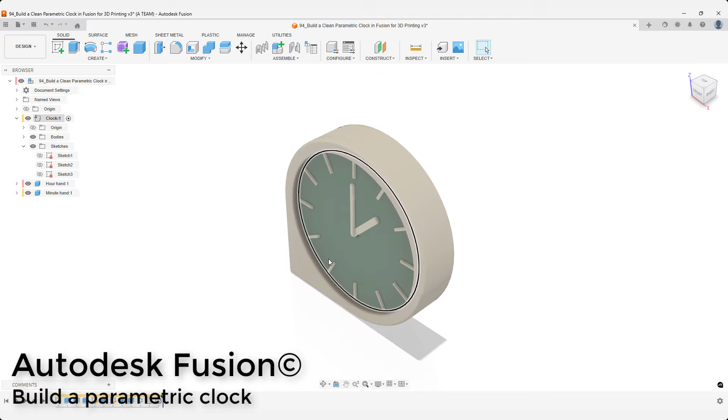This clock is fully parametric. Change one value and the entire design updates. In Fusion, I'll show you how to build it, how to fix constrained sketches when things break, how long it actually takes to 3D print at different settings, and what it would cost to have this manufactured instead of printing it yourself.

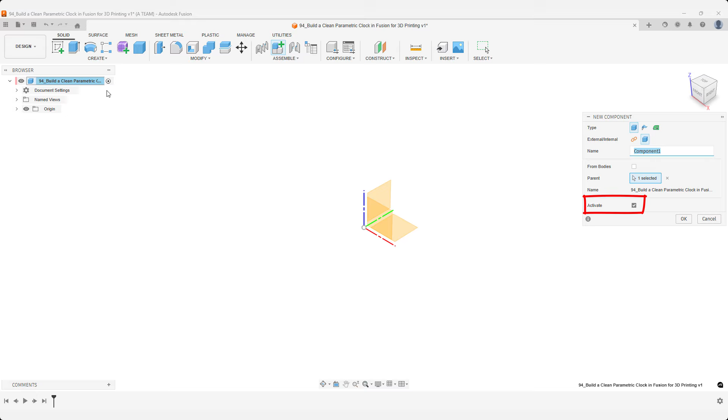Create a new component first. Clean structure makes everything easier later. Use the S key to open design shortcuts and search for parameters. Menus are useful when you're learning, but shortcuts are faster and let you find tools you might already recognize from other CAD programs.

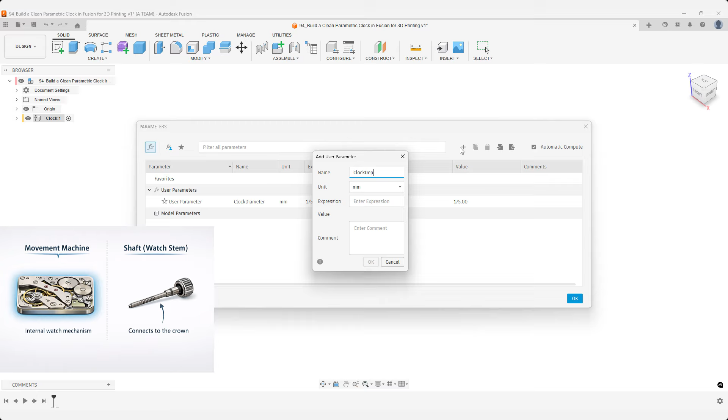We start this design with a small set of user parameters: the diameter, the depth, the movement mechanism, and the shaft that belongs to that movement. The movement mechanism and shaft are not 3D printed, but the model needs to make space for them. It's good practice to think through your parameters in advance, but you can always come back and add more later. And in this project, we will.

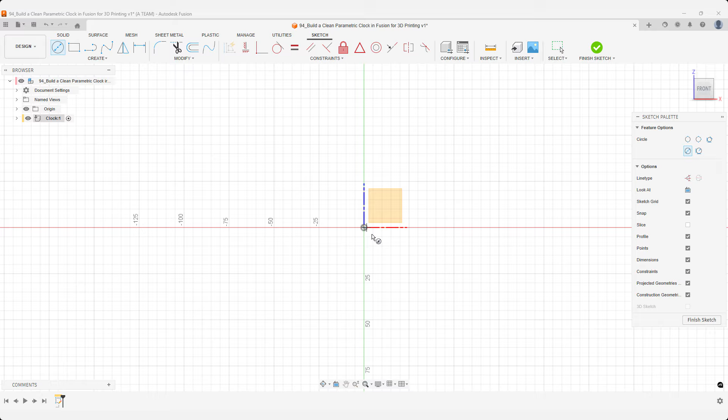For faster data entry, leave your mouse near the plus button and use the tab key to move between input fields. Press enter to confirm and close the dialog when you're done. Use design shortcuts to create a new sketch on the construction plane facing you. Press C to create a circle, start from the central point at the origin, and set the diameter using your clock diameter parameter. Next, press O to offset this circle.

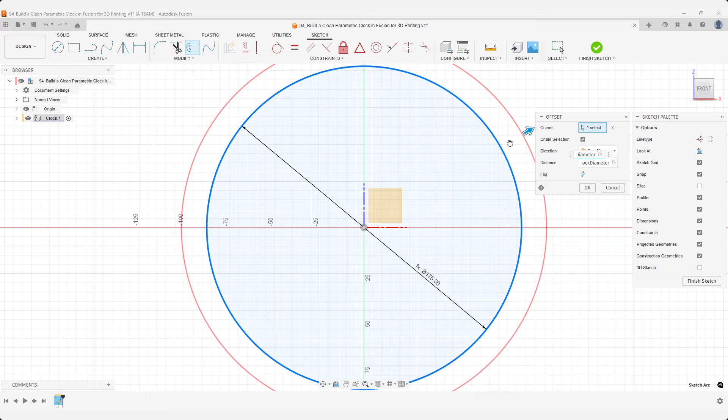We want the outer diameter to update automatically when the clock diameter changes, so use a simple formula instead of a fixed value. In this example, I offset the circle by 0.08 times the clock diameter. With a diameter of 175, that gives us an offset of 14. Now, if we update the clock diameter, the outer diameter updates as well. This keeps the design fully parametric and easy to adjust later.

Press C to create a circle for the shaft as well. When designing a real clock, leave a bit of room for tolerances and expect to iterate. It usually takes a few design and print adjustments before the fit is right. Press R and sketch a 2-point rectangle starting from the origin. Creating the rectangle first makes it easier to add formulas when referencing other dimensions.

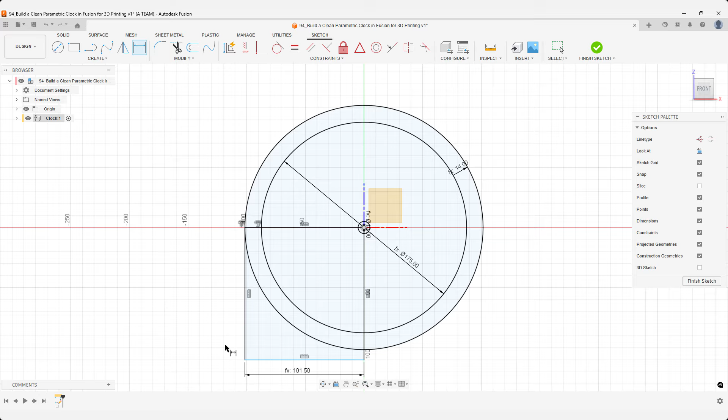Press D to activate dimensions. For this dimension, use a formula that captures both the offset circle diameter and the clock diameter. Then divide the result by 2 since we only need the radius length, not the full diameter, for a 2-point rectangle. For the second dimension, there's no need to repeat the formula, simply reference the dimension you just created. This saves time and reduces the risk of errors by keeping the setup simple.

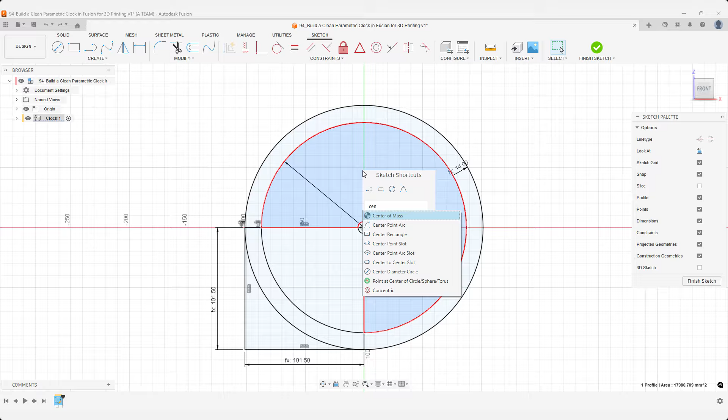You now have the sketch for the foot. Next, we'll create the index marker. Open Sketch Shortcuts and choose the center rectangle. This rectangle type works well here because it makes alignment to the center of the design straightforward. Set the height to slightly more than 10% of the clock diameter. For the width, use a fixed value. This means the length updates when the clock diameter changes, while the width stays fixed at 3 mm.

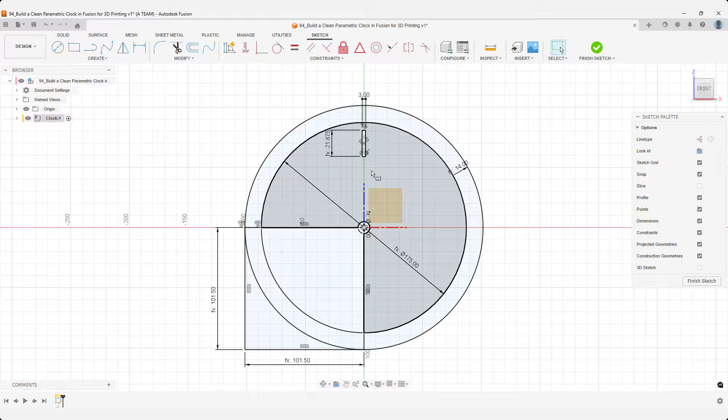We'll run into a few issues around this setup and fix them near the end of the tutorial, but for now, we'll keep moving. Finally, add a dimension that controls the distance from the center of the clock. This dimension should also update with the clock diameter. In this example, I set it to slightly more than 40% of the full clock diameter.

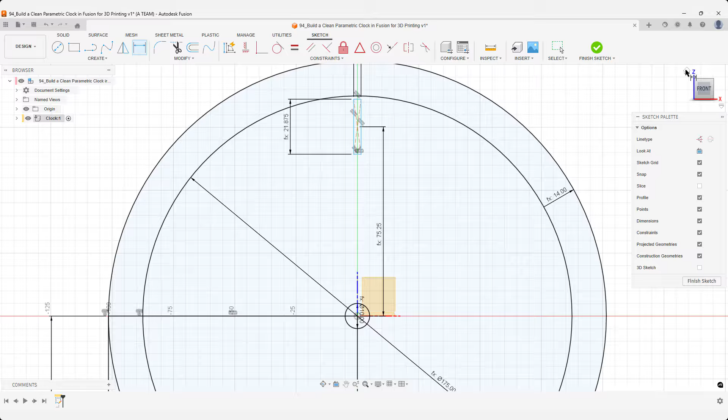If you have trouble selecting the right object in a crowded sketch or when geometry sits behind other objects, press and hold the left mouse button. This opens a pop-up menu showing all available selection options at that location. Jump straight into the Extrude command by pressing E. There's no need to close the sketch first. Small habits like this save time and they add up fast over longer projects.

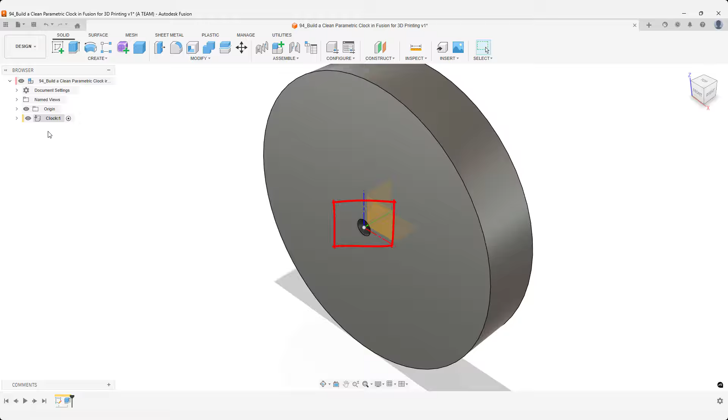Select the clock geometry, including the index marker, but leave out the symbolic hole for the shaft when you extrude using your depth parameter. After the extrude, the sketch visibility is hidden automatically. Go back to the browser and turn the sketch on again so you can continue with the remaining extrude operations. Make sure your next extrude is set to new body. This gives you the flexibility of individual bodies, which is especially useful for multicolor 3D printing and later design changes.

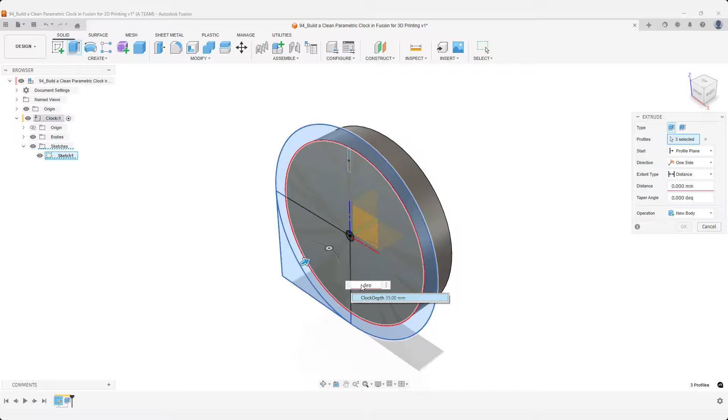While the operation is often set to new body by default, always pay attention. When you create geometry next to existing bodies, Fusion will often suggest join instead. That small change can merge bodies unintentionally, so make it a habit to double-check the operation type before confirming the extrude. Give the front a formula if you want the depth to update automatically when you change the clock diameter. Add a minus sign in front of the value, since this extrude runs in the opposite direction of the default extrude direction.

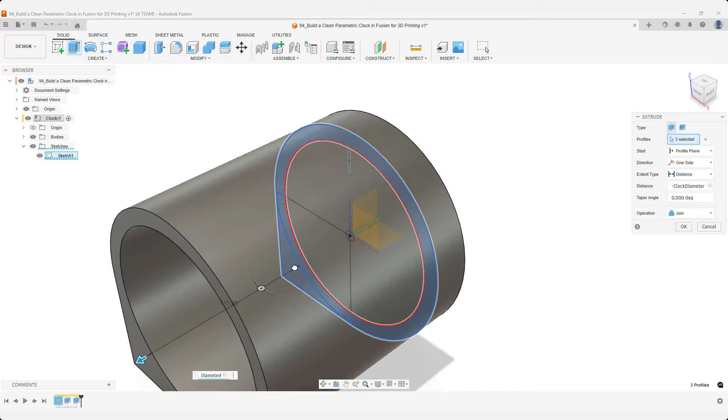Before confirming, change the operation type back to new body, since Fusion switches it to join as expected when working next to existing bodies. This keeps, as mentioned earlier, the front as an independent body for later adjustments in Fusion and for multicolor control in your 3D printing slicer.

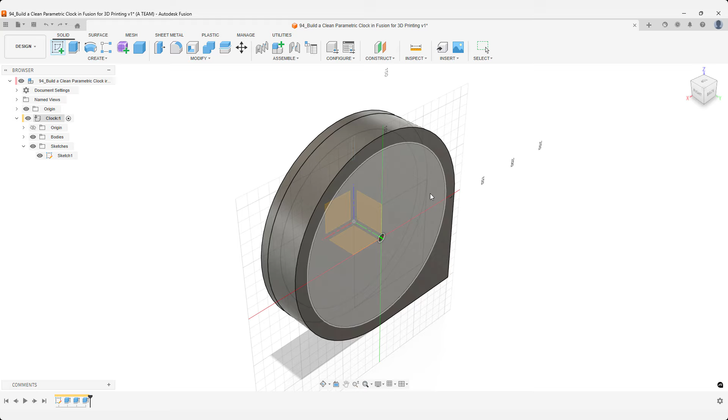This sketch on the back creates space for the movement mechanism, and these dimensions should stay fixed even when you change the overall clock size. Because of that, use fixed values instead of formulas here.

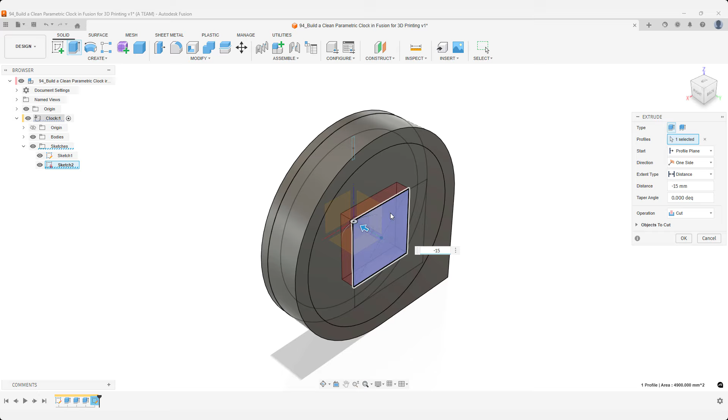From a manufacturing perspective, you can't bridge a span this wide if you 3D print the clock with this side facing down. There are a few ways to work around that. One option is to print a separate insert with a small bridge that fits inside this rectangular opening, allowing the main body to print cleanly without support.

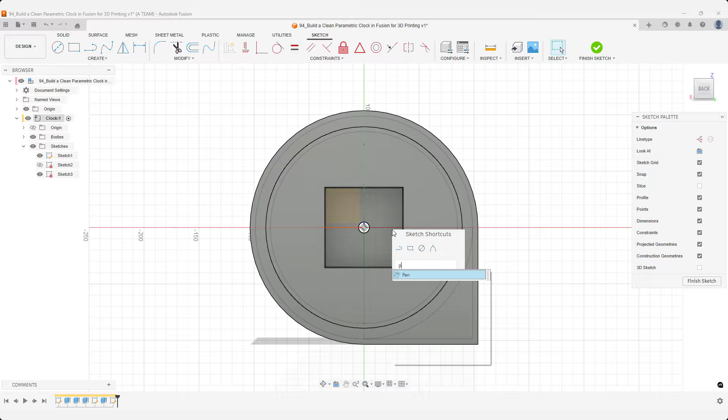For design purposes, create a projected sketch from the shaft hole and offset it slightly to allow for manufacturing tolerances. You'll almost certainly need to print and test this to find the right fit. To save time and filament, do that testing on a small standalone part instead of printing the entire clock.

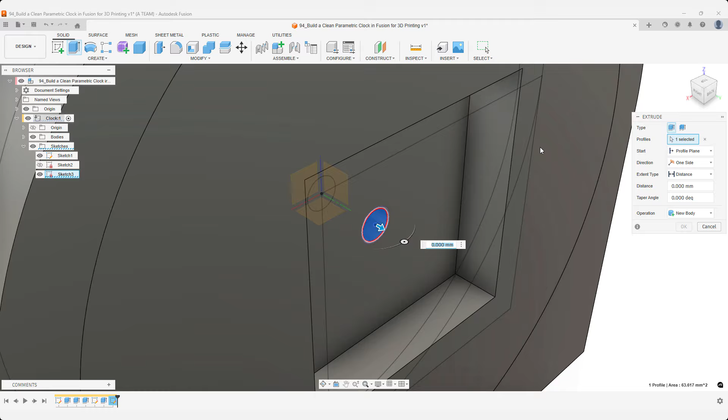Extrude this feature so it references the clock's depth by extruding to the body, then add a small distance in the formula so the symbolic shaft stands slightly proud of the clock surface. If you plan to design and 3D print the minute and hour hands as well, reverse engineer the shaft geometry so the hands fit correctly onto it.

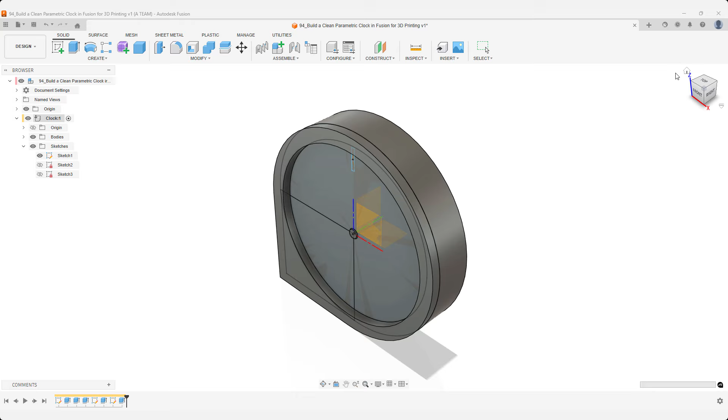Great job keeping up. Now is a good time to save the project before you move on. Next, we'll extrude the index marker: start the extrude command, select the index profile and set the operation to new body. Before you confirm, double check that the operation hasn't switched back to join.

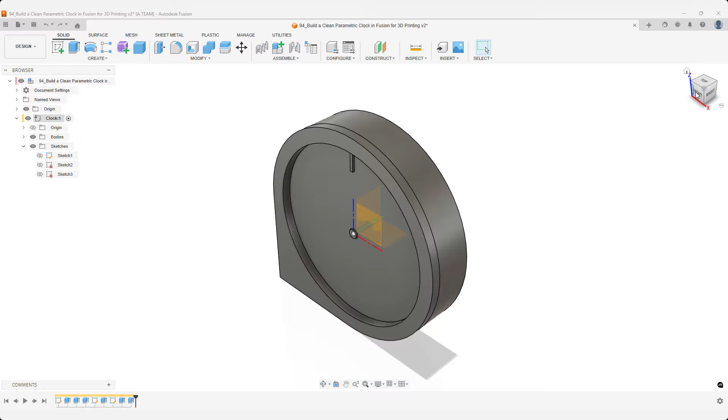We'll pattern this part later, so here's a time-saving move. Apply the appearance now, before you create the pattern. That way, every body created by the pattern inherits the same appearance automatically and you avoid redoing the styling work.

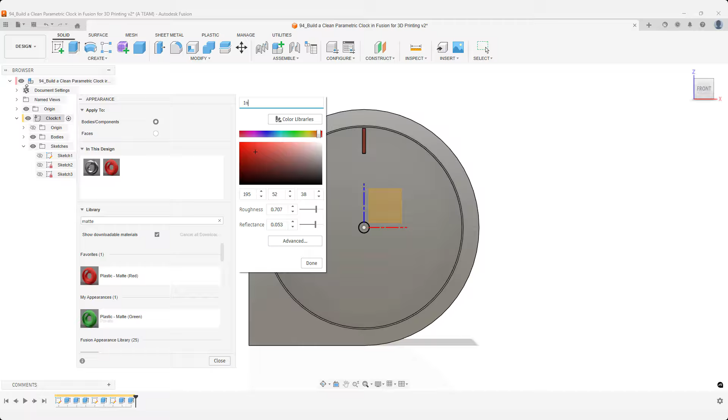If you're using custom appearances, rename them. It makes it much easier to stay organized once your design starts to grow. And if you need RGB or HTML color code ideas, there are plenty of great sources online, including AI tools. For reference, the keyboard shortcut for appearances is A.

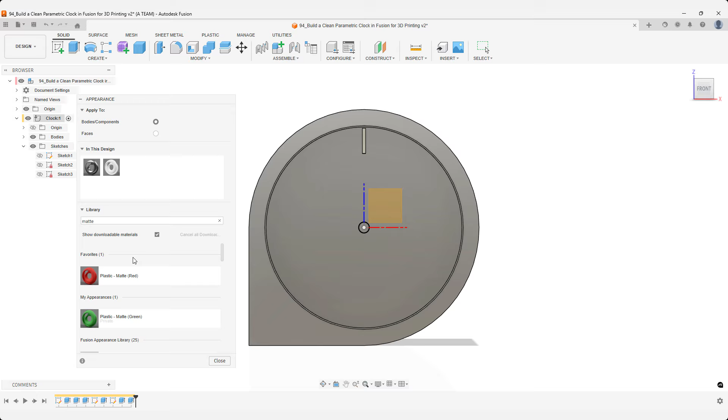Now continue by opening Design Shortcuts and selecting Circular Pattern. Use the View cube to change the view so selection is easier. Select the index body as the object and use the green axis as the pattern axis. Set the quantity to 12 and confirm the pattern.

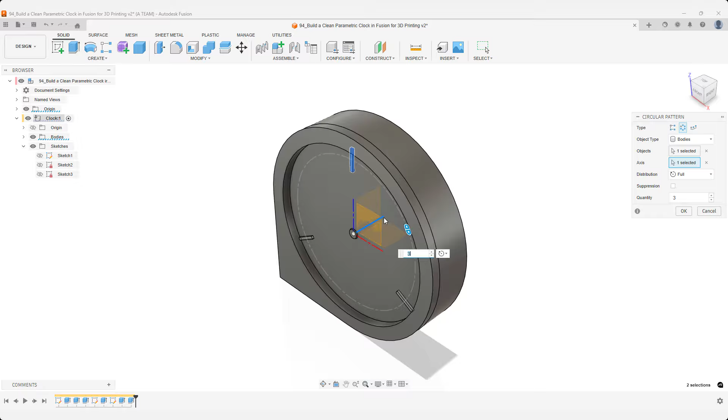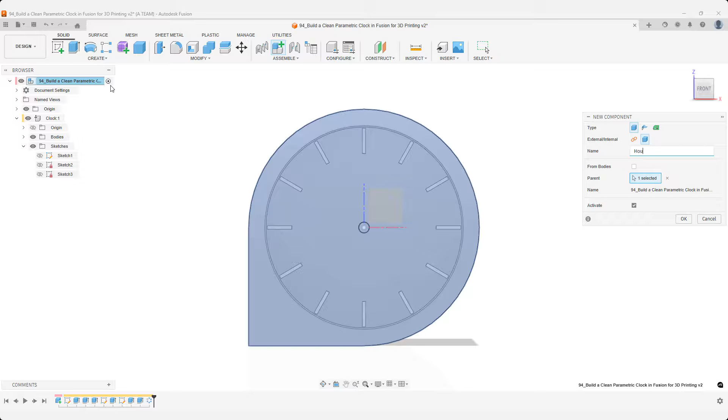With all 12 index markers in place, activate the top-level component. Create a new component, then use the Tab key to jump directly to the naming field. Name the activated component Hour Hand and confirm.

In situations like this, it's often easier to come in at a slight angle when selecting the sketch face. That makes it much clearer which face you're working on and reduces the risk of picking the wrong one. There are several slot commands available. The center-to-center slot is a good choice here, since it lets you define the slot by sketching its endpoints directly.

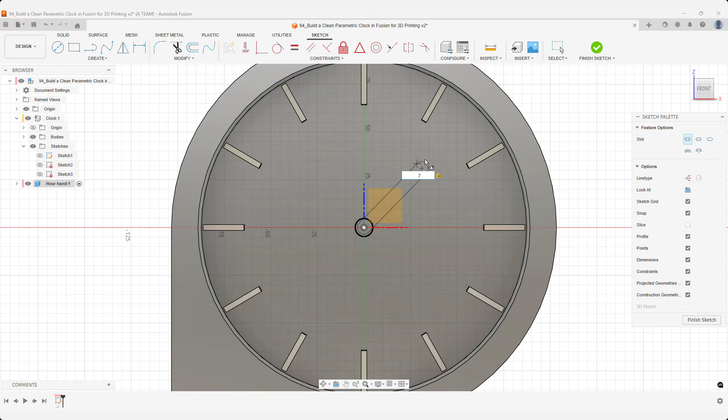When you add the dimensions, include the clock diameter in the formula. That way, the sketch updates automatically when the clock diameter changes. At this point, the setup is theoretically correct, but the sketch is not fully constrained. That will cause some issues later on, which we'll fix toward the end of the tutorial. I've intentionally left this in the recording because this is a very common situation to run into.

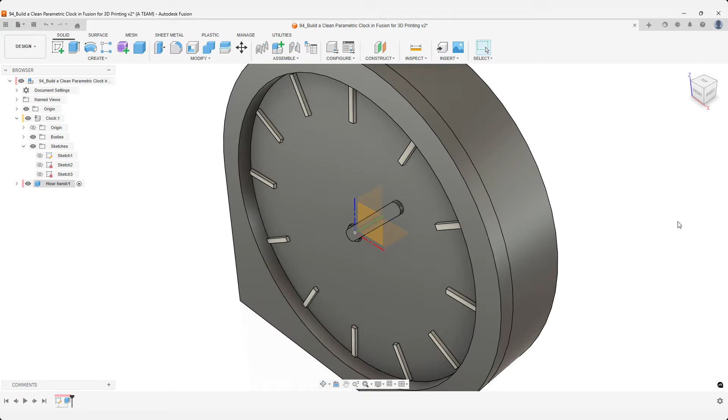For the width, I'm suggesting a fixed value here. If you prefer, you can also make it parametric using the same design principles we applied earlier in the tutorial. As a design choice, I'm also using a fixed depth. This gives direct control over the feature depth and keeps it aligned with dimensions that work well for common nozzle sizes and typical 3D printing settings.

With the hour hand in place, repeat the same workflow. Create a new component and name it. Continue with the bottom-up design approach and sketch the minute hand directly on top of the hour hand component. Use the center-to-center slot again, but update the formula and change the fixed width value.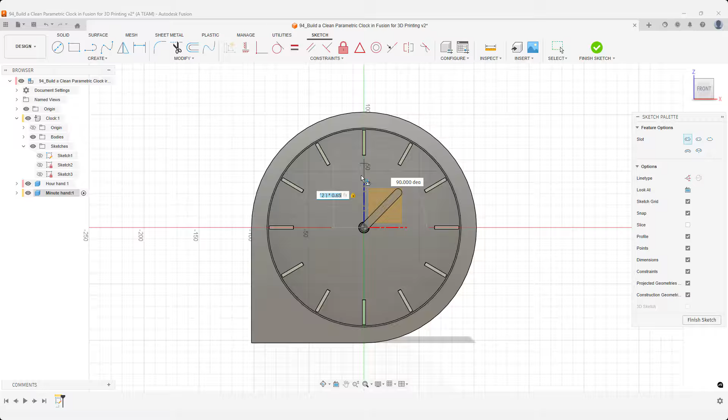The math here is very simple. If formulas feel unfamiliar at first, don't worry. You'll get comfortable with them quickly. Just like before, go straight from the sketch into the extrude command. This keeps the timeline clean and avoids unnecessary steps.

Set a fixed depth of 1.5 millimeters. A fixed depth gives you predictable results for 3D printing and helps avoid weak or overly thin features. It's time to fillet the edges. This improves the visual quality, the tactile feel, and in some design scenarios, overall strength.

Before you start, activate the clock component. This ensures the fillet is recorded in the correct component and keeps the design structure clean. Add a simple, discreet fillet to the inner circle. In the fillet options, choose the tangency setting and set it to G1.

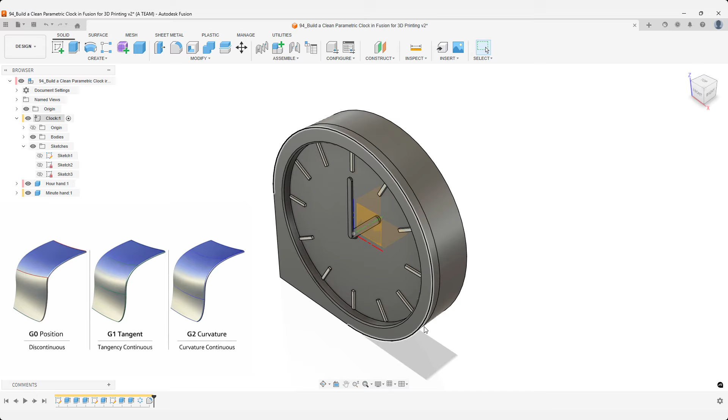G1 tangency means the fillet is tangent to the adjacent faces. In practical terms, this gives you a smooth visual transition without forcing curvature continuity. The surfaces meet cleanly, but the curvature itself is allowed to change at the transition. This makes G1 fillets predictable, stable, and well suited for mechanical parts and 3D printing.

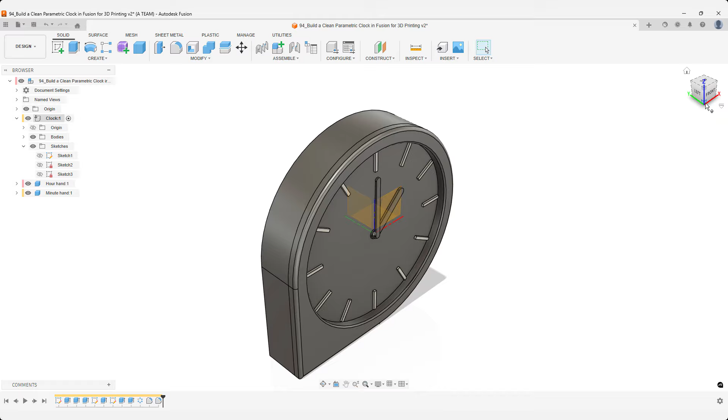Higher tangency levels focus more on aesthetic surface flow, but G1 is often the right balance between simplicity, robustness, and manufacturability. It's soon time to test the parametric setup and fix a few small issues, but before that, I'll fast forward a bit here to save you some time while adding the final appearances.

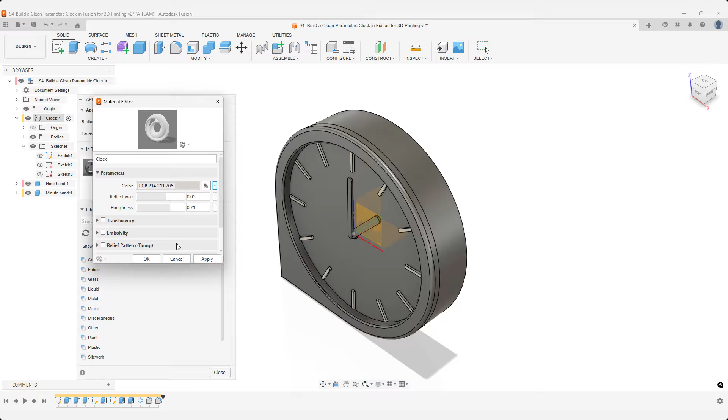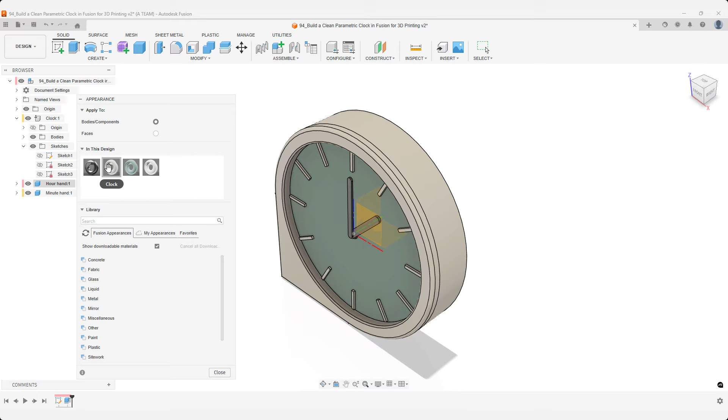One thing worth mentioning is that you can duplicate appearances to quickly reuse the same material type. This is much faster than starting from scratch each time. It's also a good idea to rename your appearances. When materials look similar, clear names make it easy to identify the right one just by hovering over them.

This is also a good point to adjust a few settings to better present the model. You can change the visual style to get a cleaner look, turn off the origin to reduce visual clutter and make the design easier to read. Before updating any parameters, save a new version with a clear description. That way you have a clean reference point and can always roll back if something breaks when the parameters update.

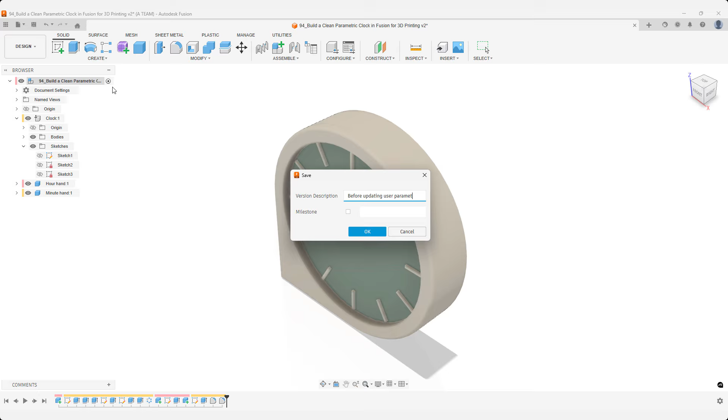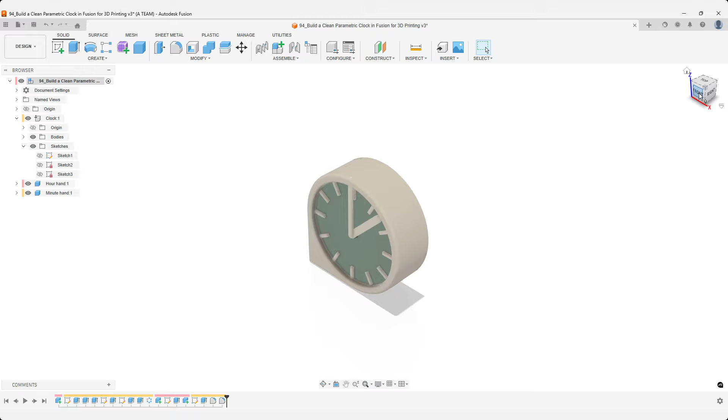Moment of truth. Let's test this. When we scale the clock down, the hour and minute hands don't follow, so something is clearly off. To debug this, the different colors assigned to the components are visible in the timeline, which makes it easy to locate the correct sketches.

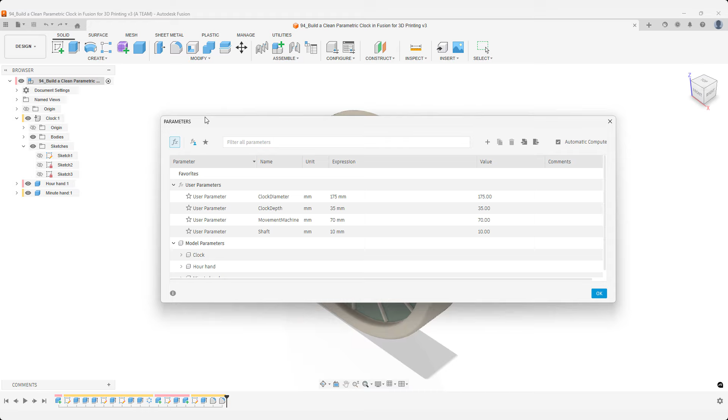When you open the sketch, you can see the problem immediately. The sketch isn't constrained, so it doesn't respond properly when the main dimensions change. To fix this efficiently, add a user parameter for the hour hand that references the clock diameter. This ties the hand length directly to the overall size of the clock and restores the design intent.

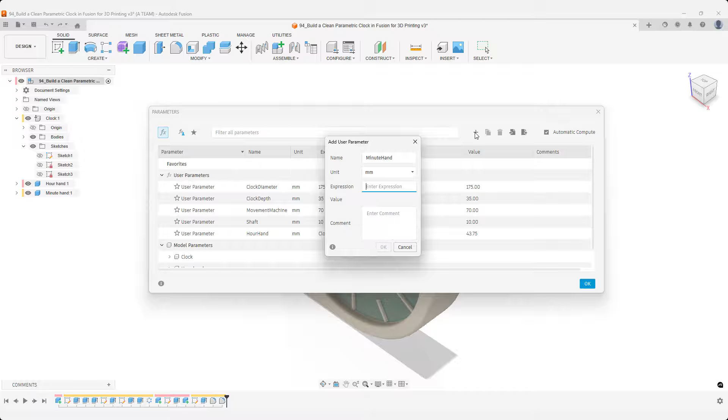We'll assume the minute hand has the same issue. Add a corresponding custom user parameter for the minute hand component as well. Once both parameters are in place, the hands will scale correctly when the clock diameter changes. Switch to the correct components and update the sketches using your new user parameters.

Small mistake on my end when I updated the hour hand. I should have constrained that sketch. In this case, adding the parameter is enough to fix the behavior, but it's still better practice to fully constrain it so it won't drift later.

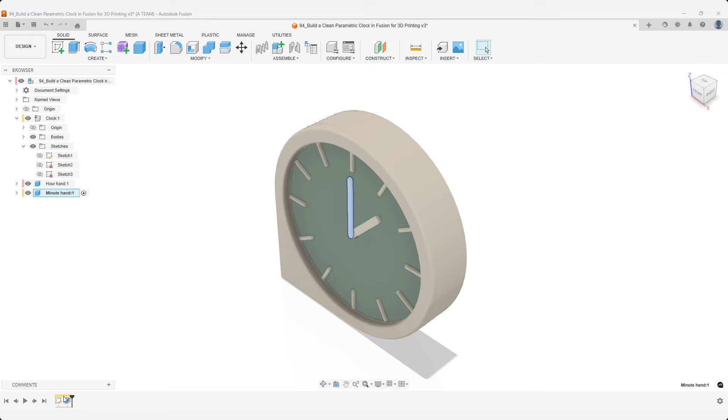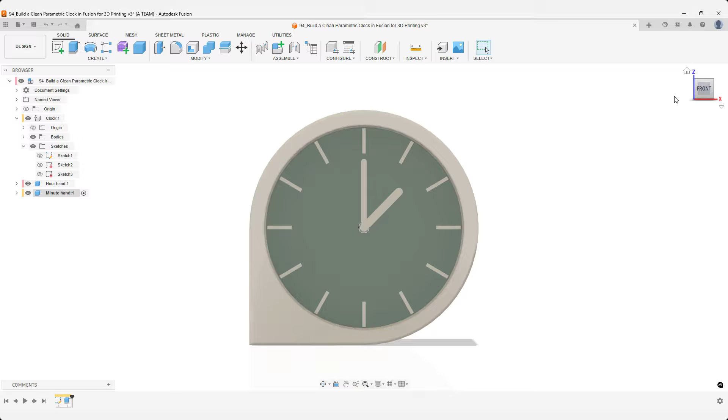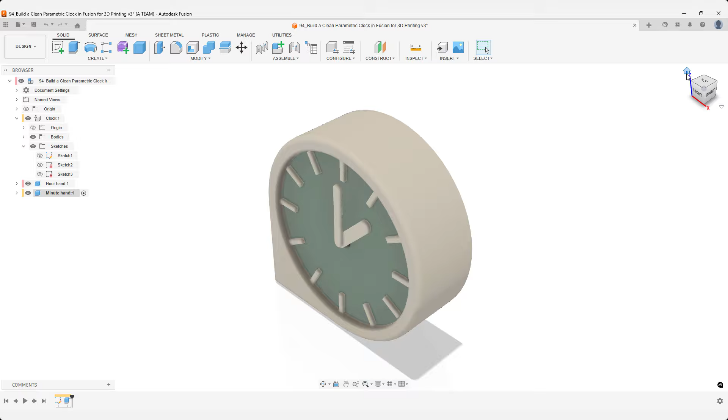With both parameters in place, let's update the model again. When we change the clock diameter from 175 mm to 100 mm, the hands update as intended, but a new issue shows up. The index marker has drifted to the right, and this is the consequence of leaving that sketch under-constrained. The troubleshooting approach here is slightly different. The good news is it's easy to locate the problem sketch, because we captured so much information in the original sketch.

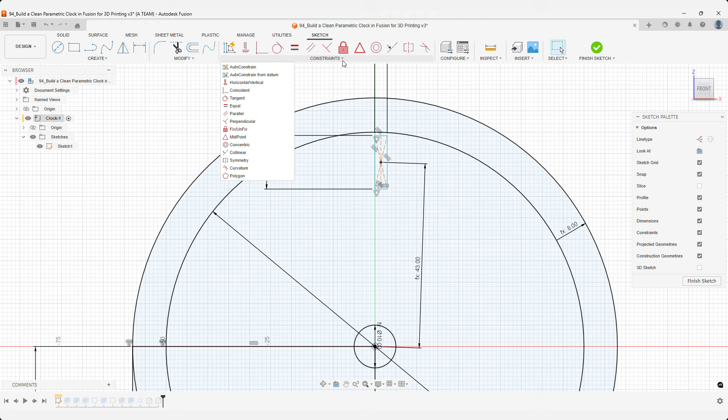Draw a line through the center of the rectangle. With the line selected, press X on the keyboard to convert it into a construction line. You'll see it change to a dashed style. This means it won't be part of the final geometry, but it can still be used to control the sketch. Now, apply a collinear constraint so the rectangle aligns with this construction line. Pick the guiding line first. As soon as the constraint is applied, the sketch turns black, which tells us the sketch is now fully constrained.

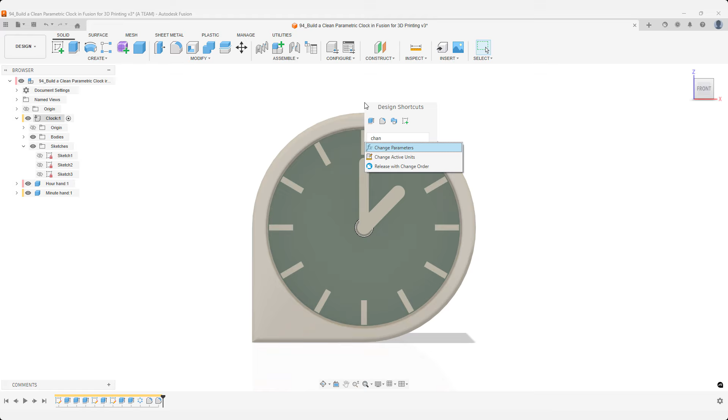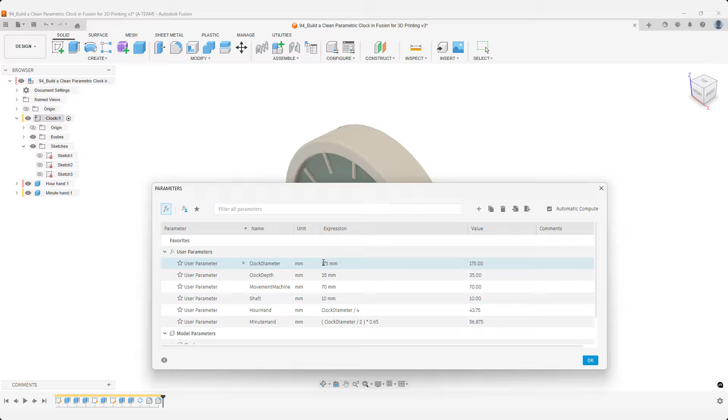Two final tests confirm the model works as intended. By changing a single user parameter, we can scale the entire clock up or down without breaking the design. From a business perspective, this means one design can cover multiple product sizes without extra modeling work. Next, we look at different 3D printing setups and how size affects print time.

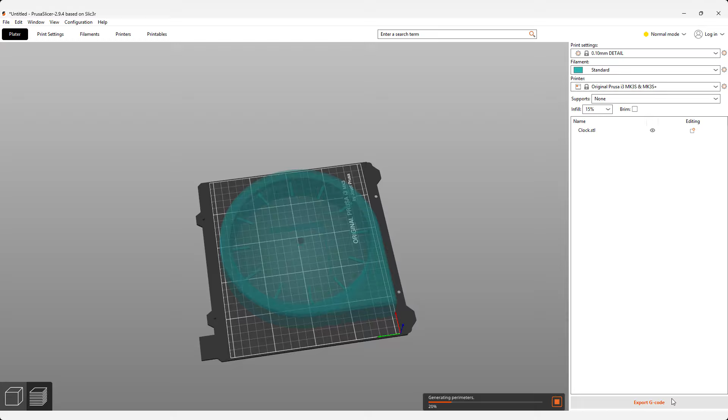We're now in PrusaSlicer, setting up the print on the Original Prusa i3 MK3S+. For simplicity, we're only looking at the main body with the hour and minute hand markers, since the print time for the hands themselves is negligible. The part is oriented with the back facing down. Because the central opening is too wide to bridge reliably, you'll need either to place something in the middle or print a separate insert. If you're printing multiple copies, reusing a small insert for that opening can save a significant amount of time since you avoid printing supports for that area on every run.

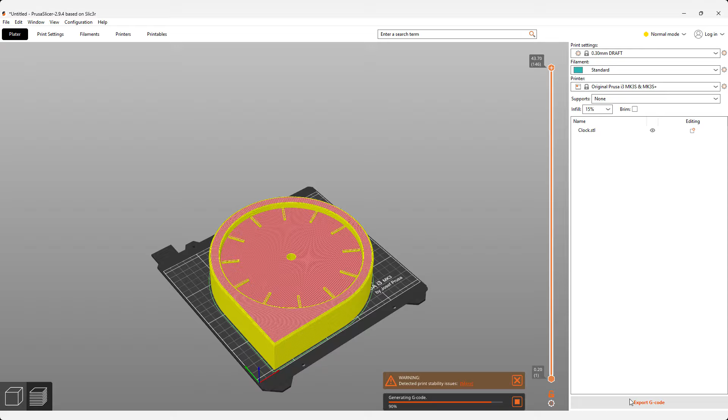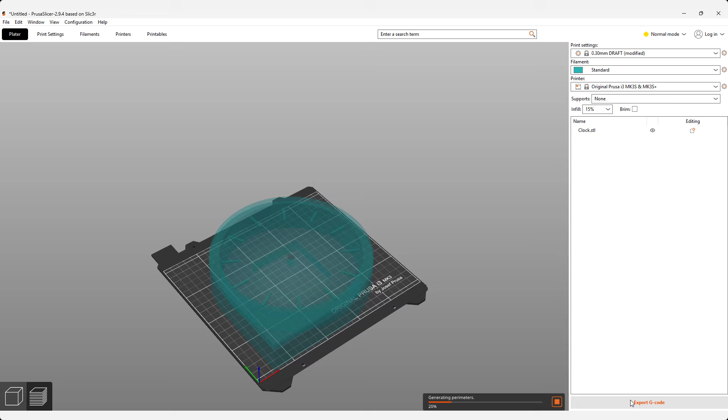I sliced this model using 4 different profiles: 0.10 mm layer height for detail, 0.20 mm quality, 0.30 mm draft, and 0.30 mm draft with ironing for a smoother top surface. You can fine-tune the print in several ways, for example by reducing infill, but the print times still tell the same story. Even at coarser settings, this is a long print. With the detail profile, it exceeds 40 hours. And that's the theoretical best case. In reality, some prints will fail, so the expected average printing time is higher than what the slicer reports.

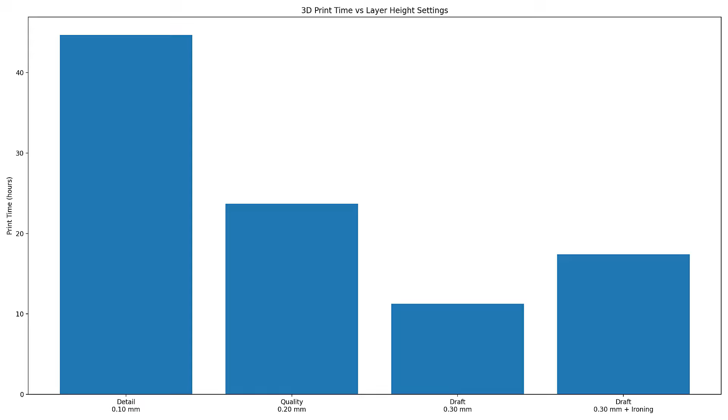I also looked up some online quotes for manufacturing this in black PLA. Pricing starts at around $120 for a single unit, drops to about $60 for 10 units, and only slightly further to $58 for 50 units. That tells a very different pricing story compared to processes like laser cutting sheet metal, where unit cost drops significantly at higher volumes. This is interesting because it highlights how 3D printing remains time-driven rather than setup-driven, which directly affects scalability and margin planning.